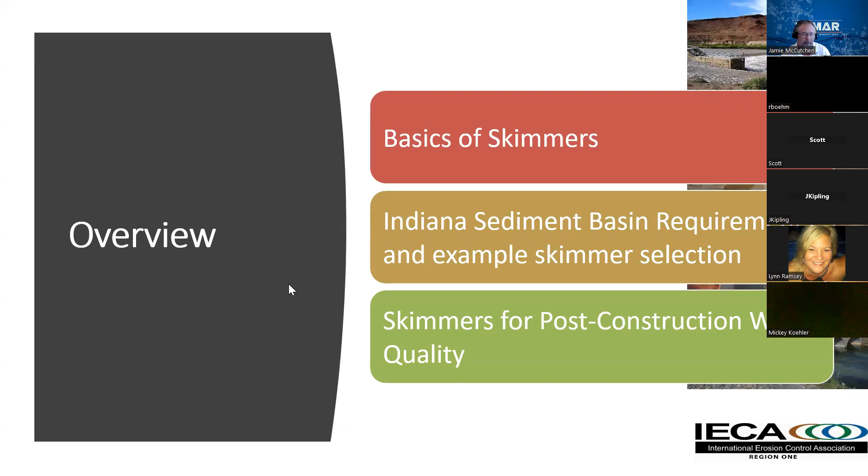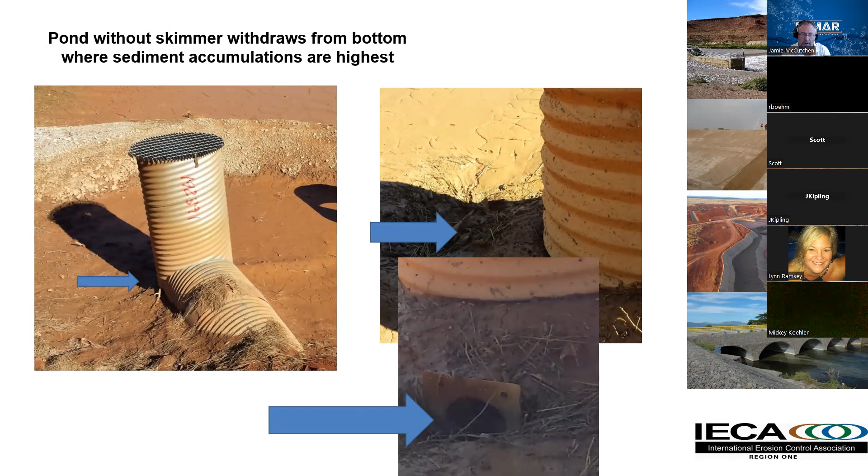Jumping right in, prior to skimmers we used perforated risers, typically designed with an orifice at the bottom, with a stone check dam in front of them. The idea was you would draw water slowly out of the basin, giving time to settle. But you see from these photos, pulling water from the bottom of the basin often results in discharging a lot of sediment, because that's where sediment tends to accumulate.

So skimmers have been around for many years. They've been promoted for use in sediment basins during construction. They meet the requirement for surface withdrawal, or what Indiana is calling floating outlets, which drain the basin from the top down, releasing the cleaner water from near the surface. Skimmers have been shown to greatly increase trapping efficiency - most basins easily obtain 80%, often up to 90% trapping during construction, if they're designed correctly.

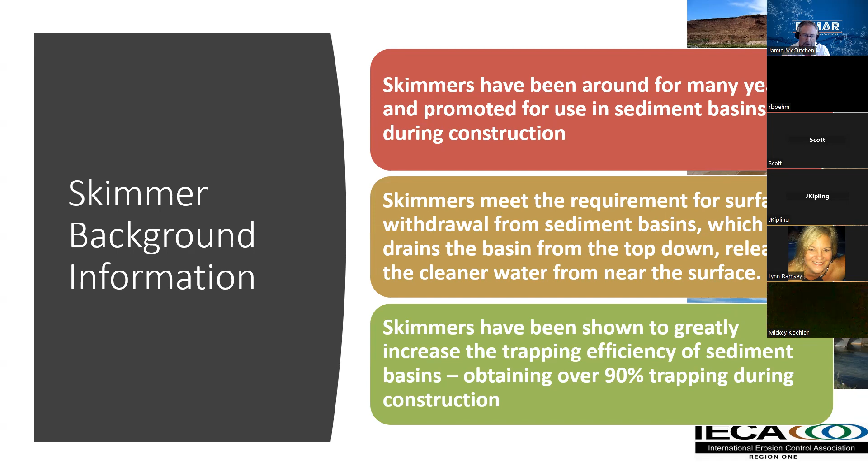So this is just an example of a skimmer. It floats at the surface - this is ours, it's called the Marlee Float. It actually takes water from just below the surface, so it has the ability to stop floating debris from escaping as well. As one of the benefits, it has this debris guard around it.

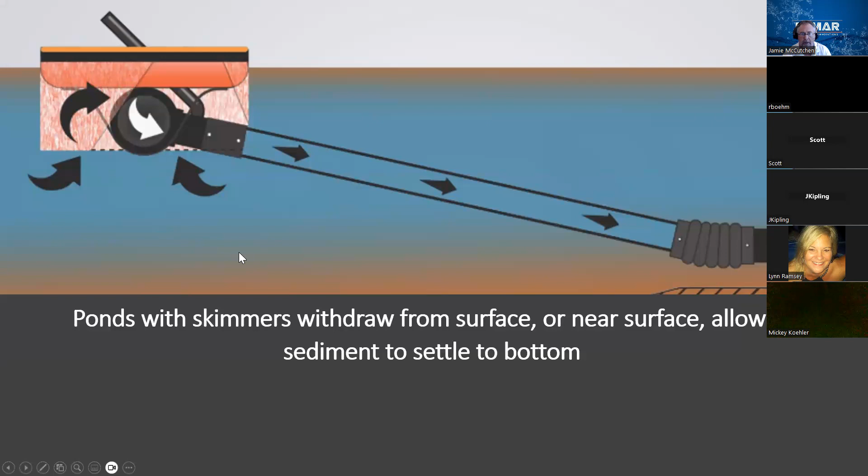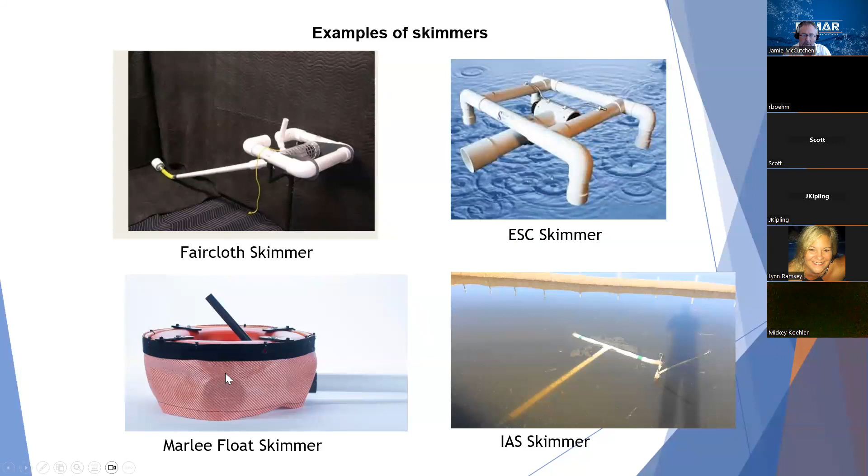There are a variety of skimmers out there. The Faircloth skimmer was the one that kind of started this, so you've probably heard of them. There's also the erosion supply, or ESC skimmer, again the Marlee Float, or the IAS skimmer.

Ohio does include that additional 1,000 cubic feet per acre for disturbed area for sediment storage. So Indiana's standard, at least the draft standard, is a good bit higher than some other states, which is going to make the basins a little bit bigger. I guess something to look at is, are you allowing water out a little too fast, not retaining enough to get the settlement time in there. But anyway, that's the standard as I understand it today.

Surface area - Indiana does not specify one, though other states specify a minimum surface area, so you just want to make sure you meet that. The principal spillway for Indiana is the 10-year, 24-hour storm. That principal spillway would typically be your riser structure and your skimmer, so you're not trying to get the 10-year storm handled by just the skimmer. Then you have an emergency spillway to handle anything above the 10-year storm. Skimmers are required in Indiana for 5+ acres - that does vary, South Carolina is 10 acres.

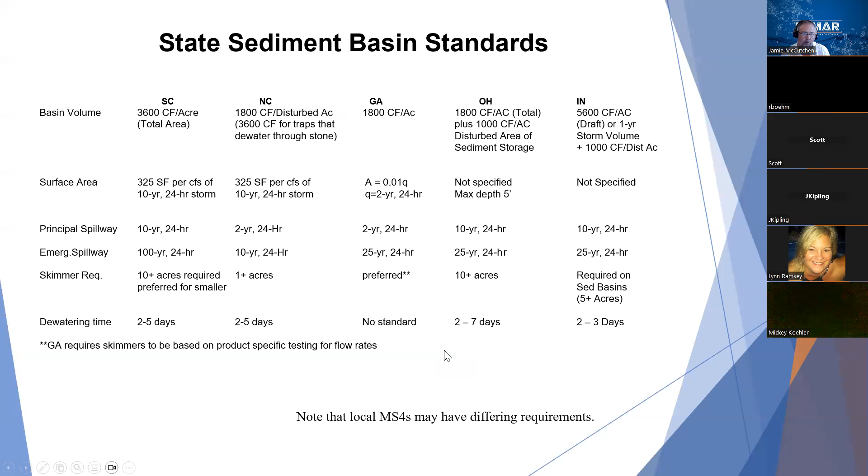Typically these are the state minimum requirements, and then some MS4s may have more stringent requirements if they have waters that they need to protect to a higher standard, or something else like an endangered species or high quality water, trout streams or whatnot. So you may have higher standards in some areas.

Specifically in the 2021 construction general permit, Indiana said sediment basins, where feasible, must withdraw water from the surface of the water column unless equivalent sediment reduction can be achieved by other measures, and it gives some alternative measures.

It also addresses freezing conditions, and that is one thing in the more northern states that has been a question: if you get significant ice in your sediment basin, how does the skimmer function? We recommend, if you're going to have a significant amount of ice anticipated during your construction, that you consider some alternative drain for those times. You may have like just a valve or something you can open to a perforated riser that allows it to drain.

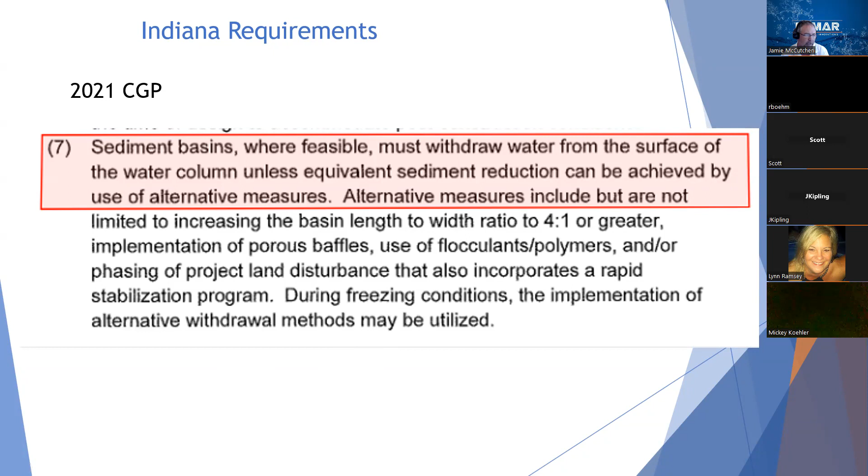The other measures here, again straight from Indiana draft standards, is to retain the stormwater for a period of 48 to 72 hours. Your dewatering zone design is 5,600 cubic feet, or you can calculate your volume for a 1 year, 24-hour storm event. And then again, you have a minimum 1,000 cubic feet per acre of disturbed area. This volume should not be included in your dewatering storage volume. That's additional storage volume for sediment storage that you will probably want to put in below the invert of your skimmer.

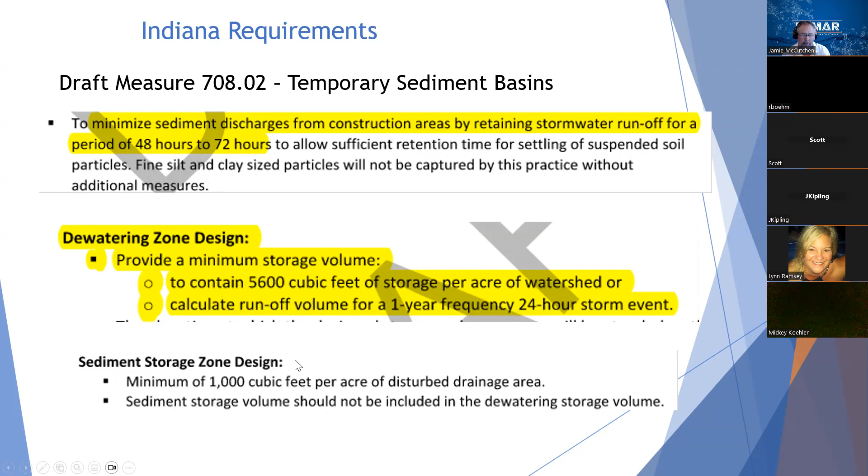So let's just go through the fundamentals. The fundamentals of skimmer basins, number one is, what is your dewatering volume? Again, 5,600 cubic feet per acre. So if we run that, say an example, 10-acre site, got 56,000 cubic feet.

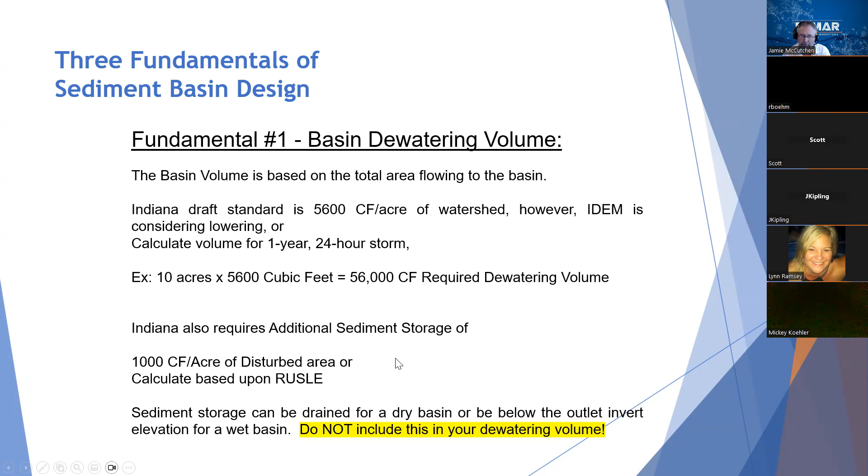And again, you got the additional 1,000 cubic feet of disturbed area, or you can calculate that based on the RUSLE equation. We do emphasize, do not include that in your dewatering volume, or you're just going to make your skimmer bigger and drain that other volume too fast. So dewatering time is your fundamental number two. Again, Indiana is 48 to 72 hours.

And then based on those two factors, you're going to determine your flow rate for your skimmer. So using our 10-acre, 56,000 cubic foot volume, a 2 to 3 day range, you're going to want to pick a skimmer between 28,000 cubic feet and 18,700 cubic feet per day for that flow rate. If you do that, you will meet your 2 to 3 day drain time for that required volume.

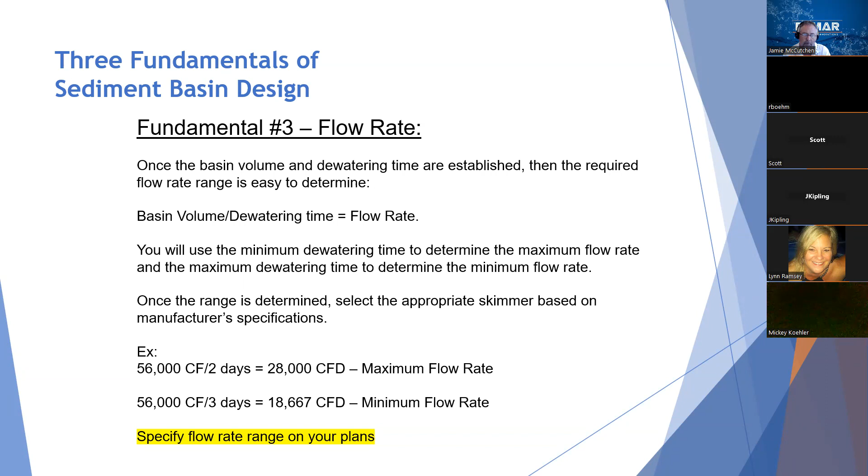One thing to point out, especially if you're just learning about skimmers, is skimmers are not all equal. Georgia commissioned TRI Environmental to do a study on skimmers when they were updating their manual. They tested 3 different types of skimmers, and I use this as a good example. This is 3 different 3-inch skimmers. Their test tank is 4 feet deep, so flows go from 1 foot to 4 feet.

2 of the skimmers are pretty consistent, around 37 GPM, while the third one is almost double at 70 GPM. The other thing you'll notice is that all 3 skimmers had an increase in flow from 1 foot to 4 feet of about 25% of their flow rate. So these two were still fairly consistent, around 50 GPM, one just under, one just over, but the other one, again, is nearly double at 90 GPM.

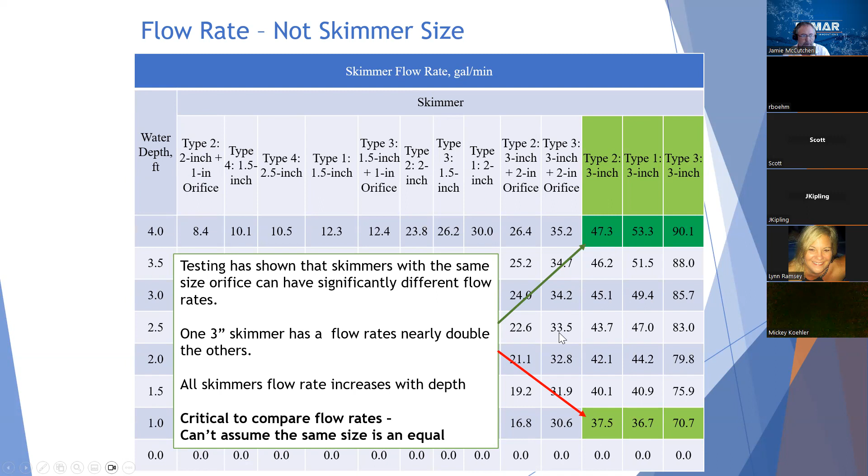So the point is, if you just simply say a 3-inch skimmer and don't say the brand or anything else on your plans, you may not get the skimmer you're wanting. You may, if you intended to have one of these skimmers do it, drain the volume too fast. If you intended to have the other skimmer, you drain it too slow. So it's important to focus on flow rate, not just skimmer size. And so we have a really simple design tool on our website.

For Indiana, we'd recommend using the one with a permanent pool. And we worked closely with Ohio in developing this tool because they were seeing some common issues with engineers when they were going through this.

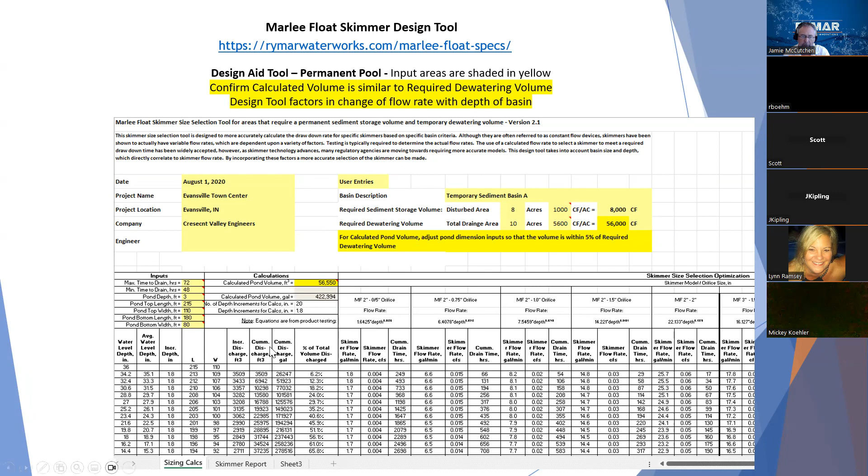And then you click on the skimmer report page here at the bottom, and that'll take you to a nice, neat 8.5 by 11 sheet that will give you the information that you have. So at the top, you're going to have this check to confirm your required dewatering volume and your calculated dewatering volume are close. So for the reviewers that are here today, that's a quick check to make sure that the skimmer sized correctly based on what's required.

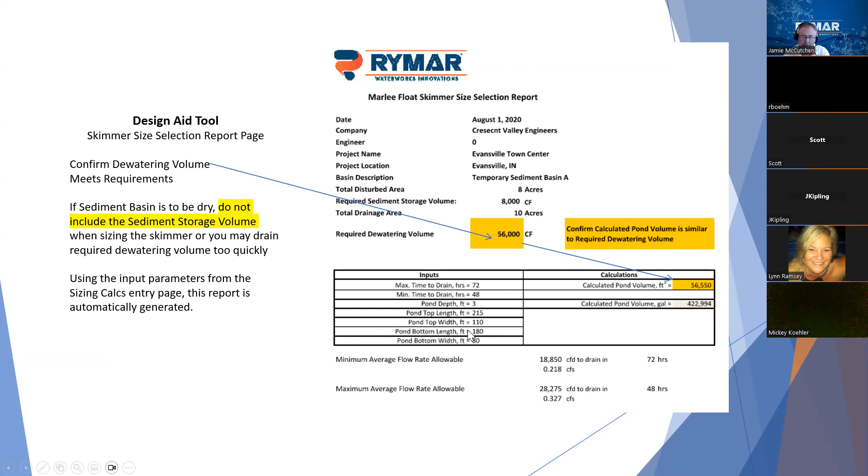You're going to have your minimum and maximum flow rates here, and all the information you put in to determine this, readily available. And because it's our tool, we're going to give you which skimmers meet your required time. So in this case, we had 2 different options: our 6-inch with a 3.5-inch orifice, or a 6-inch with a 4-inch orifice, range of 52 hours to 68 hours. So the engineer can pick either one, whether they want to drain a little slower or a little faster. But really, it's a simple Excel tool available on our website.

There's no sign up or login or anything to download that. And we intended this to be a simple page you can print out, include in your SWPPP, or we often see engineers include it in their plans to give that information.

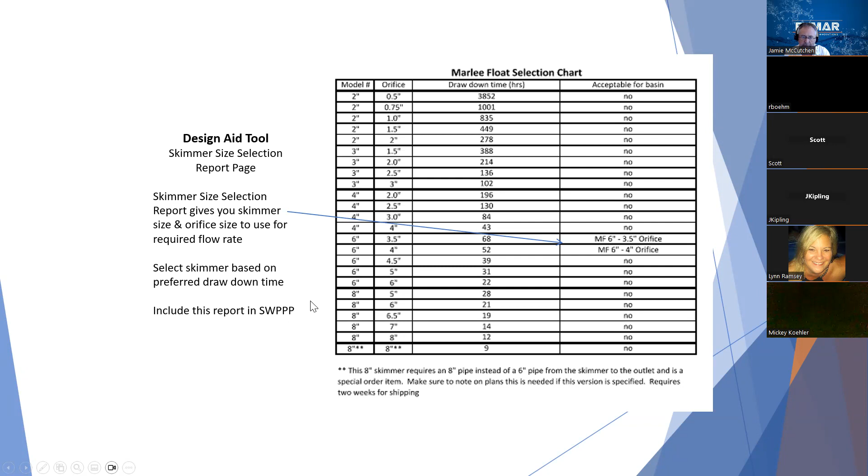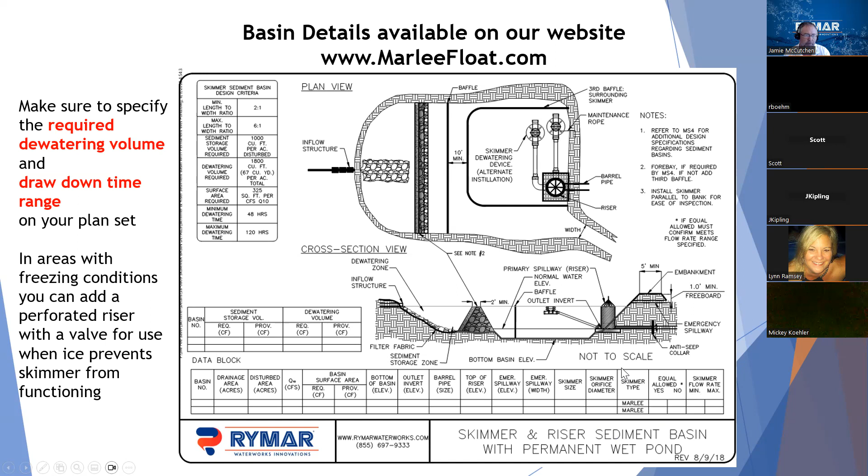And then what's your skimmer flow rate. Go ahead and set your minimum and maximum. And that way, if the contractor does want to use a different skimmer, as long as it falls within that range of flow rates, it should be approved without having to go through a whole lot of review time to confirm that.

Real quick, we'll go through some skimmer installation photos, just some things to look for. Again, understand that in Indiana they're not quite as common. So one of the things we want to look for here is this pad. Most places specify some sort of a stone pad for the skimmer to rest on. The detail that we have specifies a depression, because what you're going to notice here is that pond was graded.

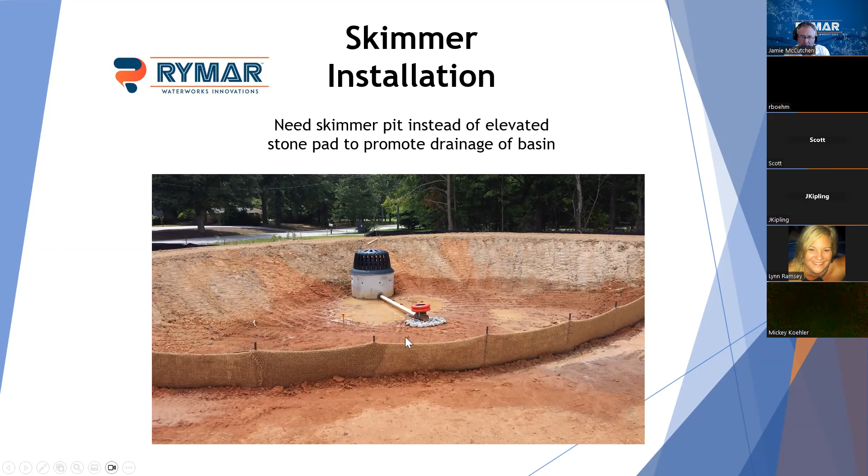It looks good - they tracked in the sides, they got their baffles, everything's looking pretty good to start with, except that then they put the stone in, and that means you're going to have, if this was intended to be a dry basin, water ponding in there. Now in Indiana, with your sediment storage volume, you're going to end up being a wet pond. So this should always be sitting below, and you're probably always going to have a little bit of water ponding in there. We've seen some really bad installs.

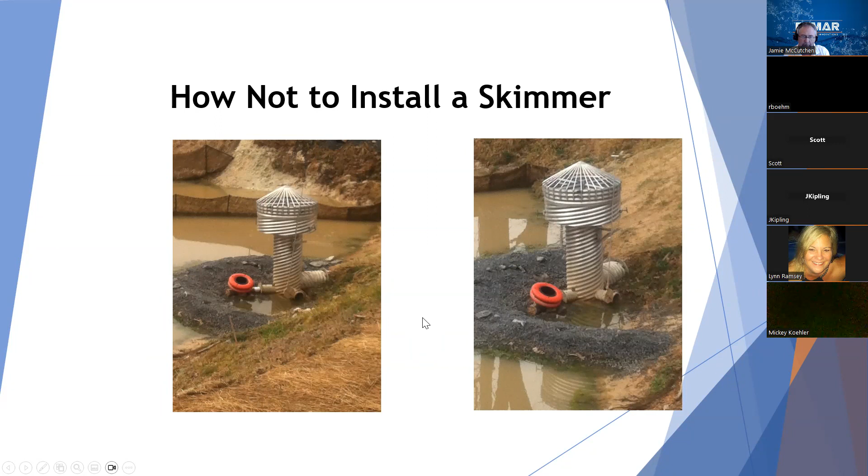This came from an inspector, I think in Ohio, but the contractor just did about everything possible wrong in this picture. And then sometimes they even put them in upside down - so they put it upside down. They didn't put in near enough room here for the skimmer to float up. Again, a lot of things wrong by the contractor.

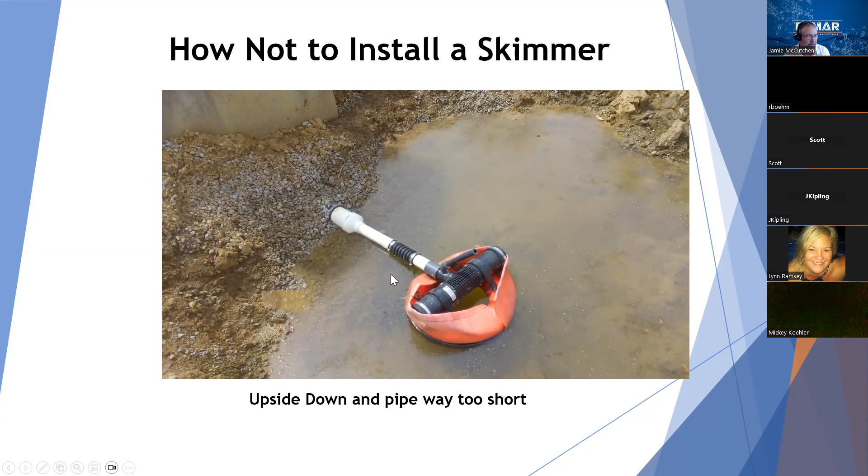We do have reps that cover our states, and we also work with our distributors. We typically sell through Core & Main, Ferguson, and other local waterworks suppliers, and we try to train them so they can tell the contractors. But if you ever see a bad install, please reach out to us and tell us - we'd be glad to reach out to the contractor and help them do it right.

Last picture here is a maintenance item. So if you ever see vegetation growing out of the skimmer, it probably needs some maintenance. This one had a big root ball growing in it. So they're not maintenance-free items - they do require maintenance occasionally.

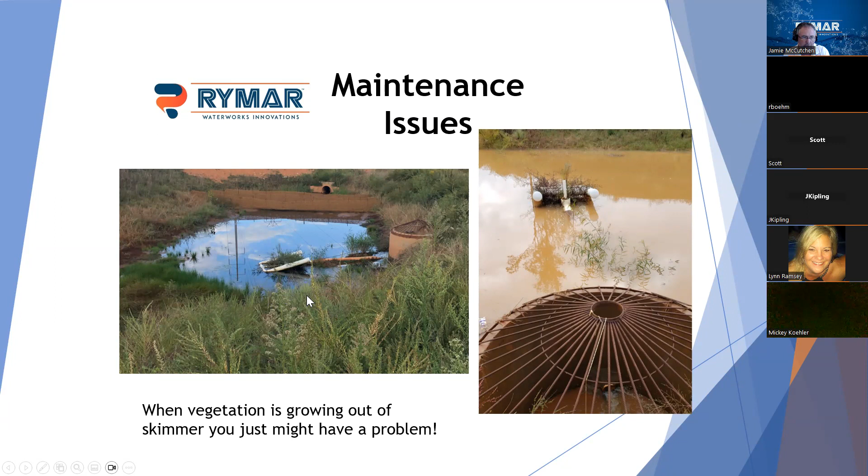So that kind of covers the very basics of skimmers. The other thing we want to focus on today is permanent use of skimmers. I was told by someone - and haven't found this in the regs yet - that Indiana was looking at incorporating some sort of floating outlets for permanent use as well, and we'd really encourage that. We know we still have to address the freezing issues, but skimmers can be really good for maintenance.

So you'd want to consider them for permanent use, because number one, basins are designed to capture pollutants by allowing time for settlement. That's been the standard for water quality - you hold that first flush volume and allow things to settle. And so if you're going to do surface withdrawal from a permanent retention basin, it's going to release the cleaner water from near the surface and get more time for pollutants to settle.

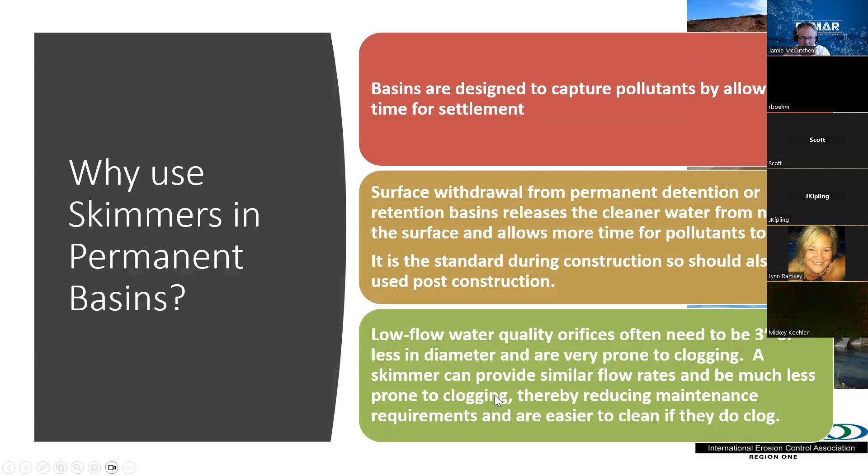It's become a fairly standard practice during construction, so it doesn't make a lot of sense to do that during construction and then post-construction take out the skimmer and pull the water off the bottom again. And then the other thing is low flow water quality orifices often need to be 3 inches or less in diameter, and they're very prone to clogging. So a skimmer can provide a similar flow rate - it can have a larger orifice because it's got less head, and it's going to be much easier to reduce clogging.

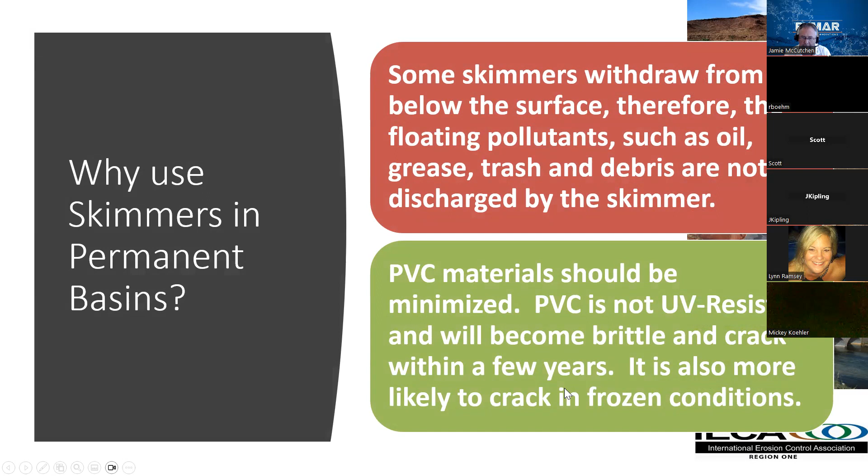So the other thing is some skimmers, like ours, withdraw from just below the surface. Therefore, floating pollutants such as oil, grease, trash, and debris are not discharged by the skimmer. Also, PVC material should be minimized. PVC is not UV resistant and will become brittle and crack within a few years. It is also more likely to crack in frozen conditions when freezing is a concern.

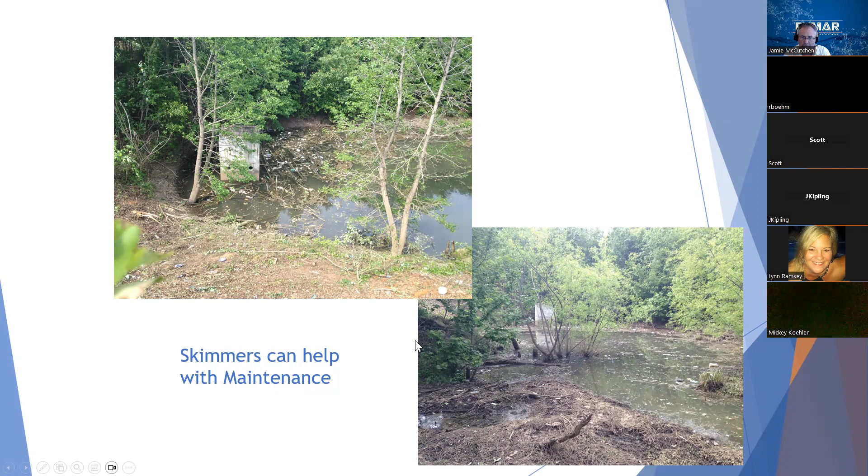So this is a quick example of how skimmers can help with maintenance. This is a site we did in Simpsonville, South Carolina. It was a really overgrown site - the pond was in bad shape. Turned out that there was a 2-inch orifice about 6 feet below all this muck. So we redesigned the pond to use a skimmer instead of that 2-inch orifice.

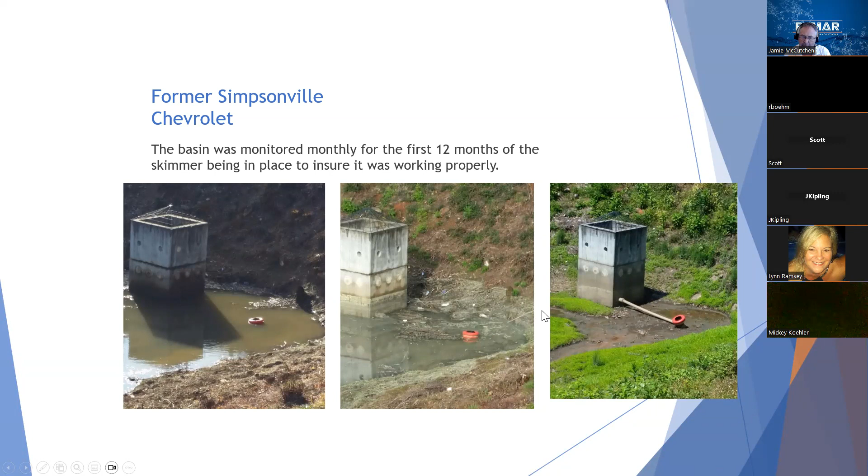This was a pilot project in South Carolina, so we were required to monitor it every month for the first year and then quarterly for the 2 years after that. About a year after we put this in, they were maintaining the pond, but they did not get all the debris out. It had about a 5-inch rain in just a few hours, and you can see all the debris that came down here, got to the pond, to the basin, and to the outlet. And the skimmer was still able to drain the pond down without getting clogged.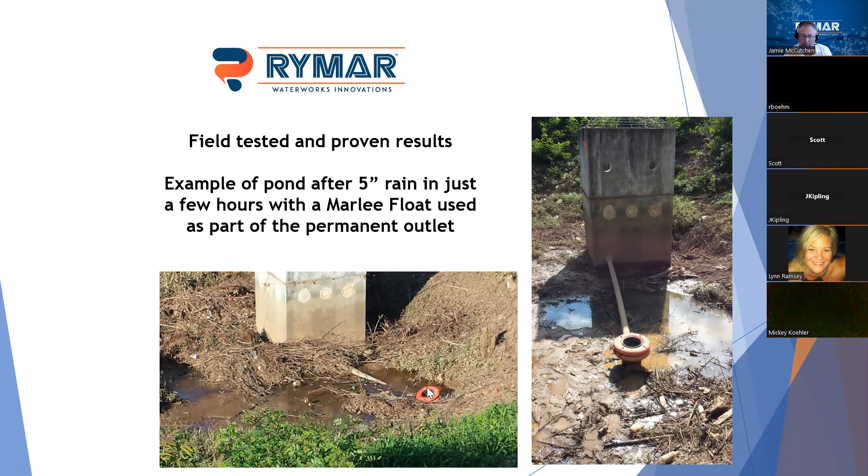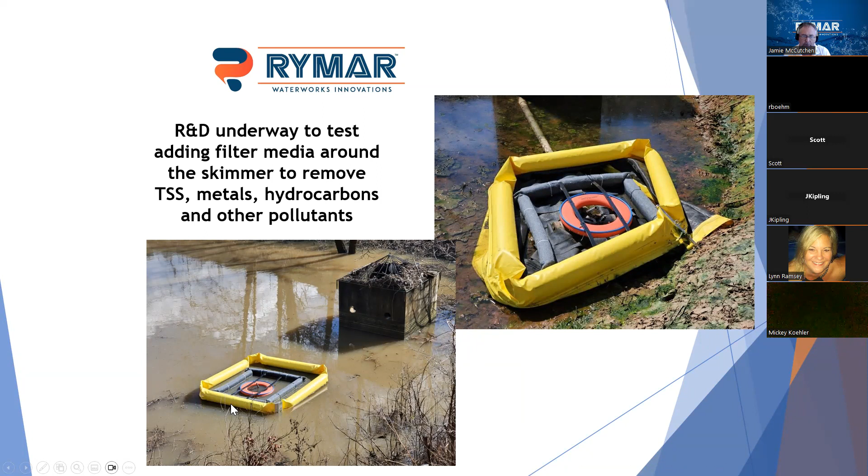Last thing about this, we've used this pond as kind of a guinea pig. We're doing R&D to test a filter to go around the skimmer to be used for post-construction.

Some of the benefits to using skimmers with filtration versus using the settling process: the skimmer can be sized to control the peak rate for the lower storm events. It also increases filter efficiency by withdrawing from near the surface where the water is cleaner, and it's easy to access for maintenance and changing the filters.

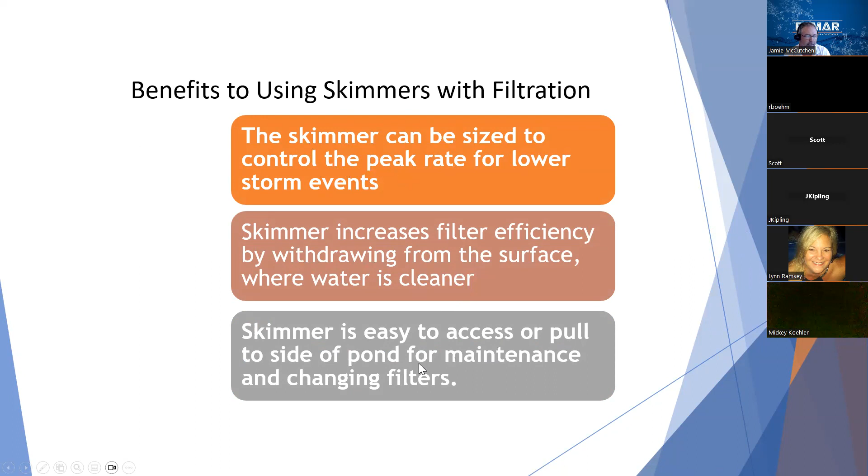However, there are some problems or challenges with using filtration. The filters are prone to clog over time, which will require maintenance and periodic cleaning or changing. As we said, your skimmer's got to be durable. It's got to last more than a few years to be suitable for permanent use.

And the biggest one, for all the folks here that are with MS4s with the state, there are no established standards for basis of design and permitting based upon a combination of pond and filtration. So what we typically see is the first flush water quality volume being held for a certain amount of time. But if you try to treat that with a filter instead, how do you do that?

I'm not sure if we have anybody from Indianapolis with us. I understand Indianapolis does have a list of approved devices, and to be on that list, the first criteria is you be tested by or certified by NJCAT. We have not had our filter certified by NJCAT yet, but it is tested to an ASTM standard. So Indianapolis has said they may have to change that and allow the ASTM standard before they can allow our skimmer there. But most other MS4s in the state have said this concept would be acceptable, at least to be considered on a site-by-site basis.

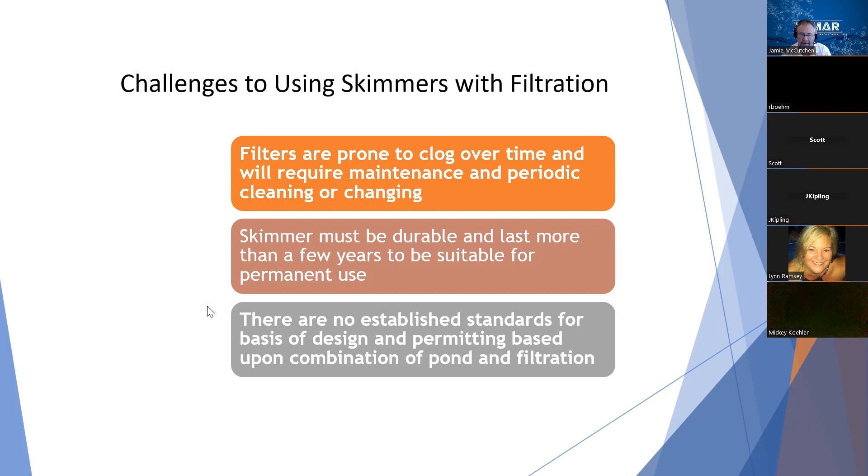So again, this goes back to our kind of guinea pig site. We've now tested this—we actually did the testing in a lab. It was tested by TRI Environmental, to a relatively new standard by ASTM. And it confirmed that we got over 90% TSS removal with our combination skimmer-filter setup.

Our filter is a two-stage filter. The outer stage is a polypropylene woven mesh—basically just a big screen. The inner filter is a non-woven material called Adsorbate. It's great with TSS, it also helps with hydrocarbons, has some benefit for metals, and we're hoping it may have some benefit for phosphorus and nitrogen as well, but we have not tested any of those. We've only really tested it for TSS with the skimmer so far.

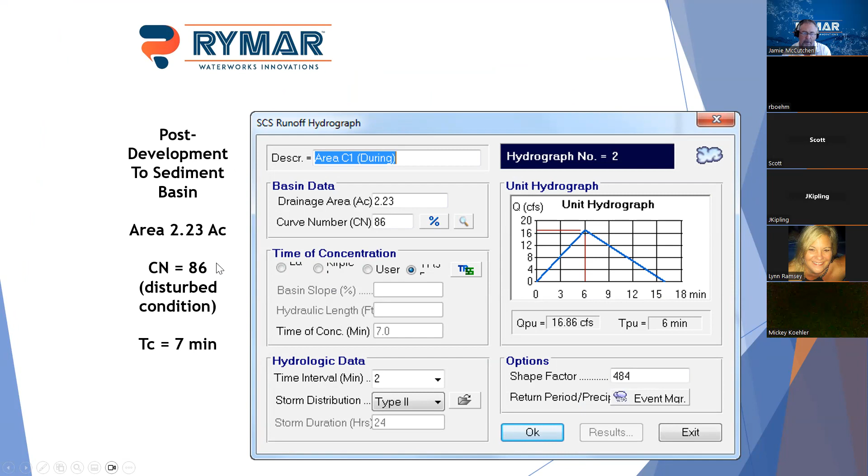So go through quickly the modeling for Hydraflow. Hydraflow has kind of become the standard for hydrology modeling. The main thing there is a kind of example site: we have a site with 2¼ acres being developed, curve number of 86.

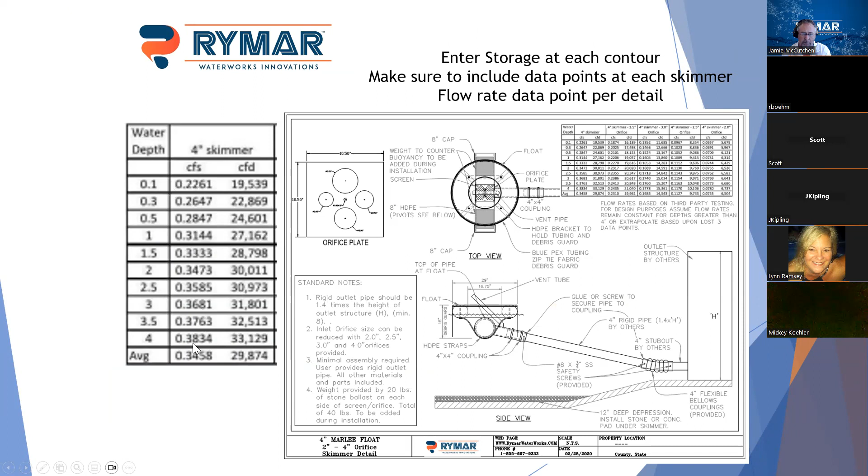When you're developing your pond stage storage table, what you want to do is put in a stage so that you can put in a flow rate. In this case, we did 0, 0.1, 0.3, and then a half foot up to 4 feet. Then you just take the flow rate from our details—our skimmer details provide the flow rate at those intervals—and use the user-defined column to enter that information.

So you'd put your standard barrel in, your culvert A. In this case, we had a 6-inch orifice about 1.75 feet above the bottom, the top of the riser, and the riser had a rectangular weir in the top. But to put in the skimmer flow, we use this user-defined column.

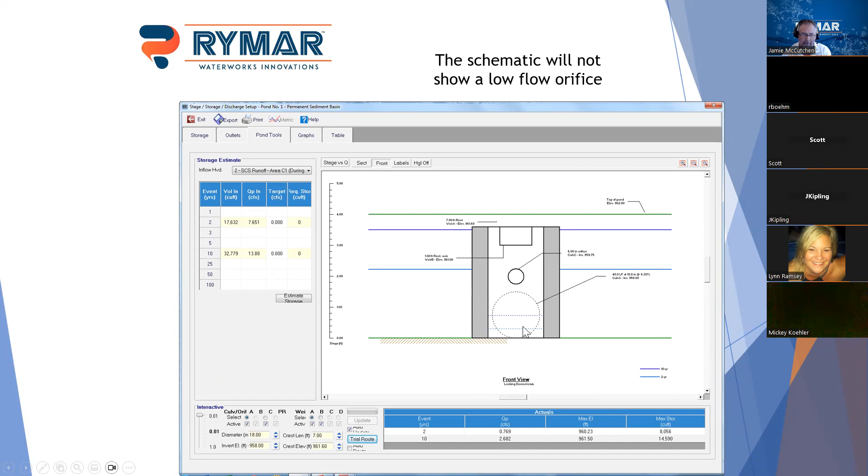And so when you look at your schematic of Hydraflow, it's going to look something like this, where you normally would have a low flow orifice here—you don't have that. You've got your other orifices configured in there, but you can see your skimmer flow here. That's the flow rate for your skimmer.

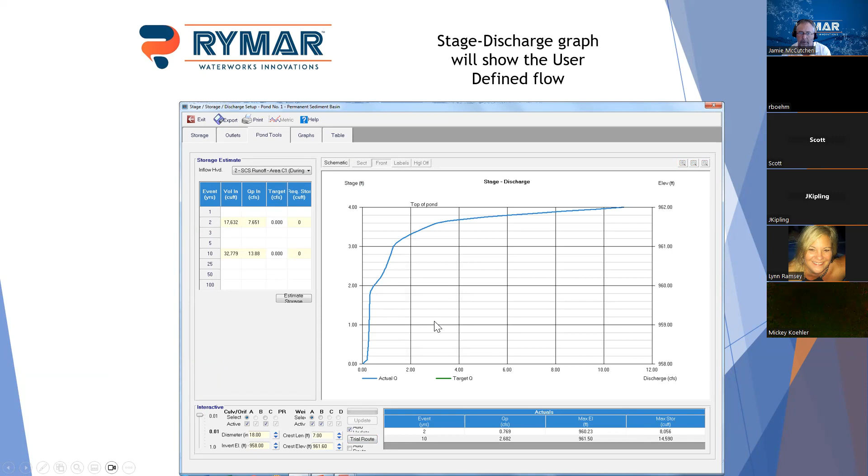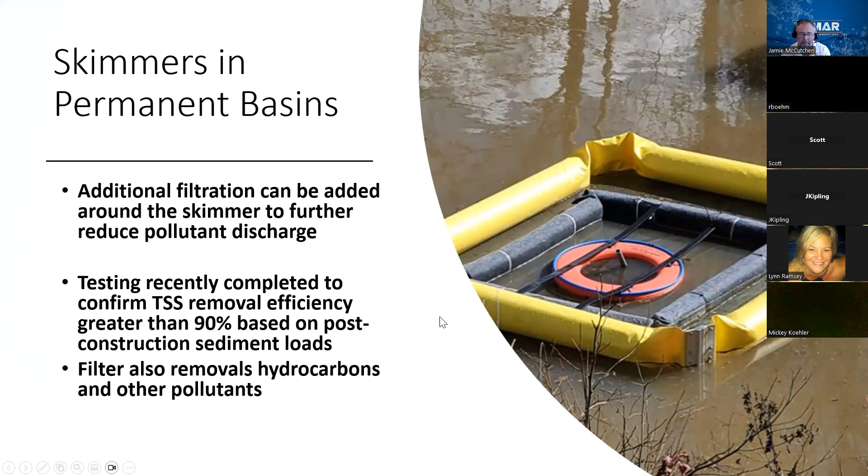So that's just a basic example, not intended to be an intense training course, of how to model the flow with a skimmer. The last thing we want to touch on is the filtration-based water quality. We've done our testing, met 90%, but now if you're going to do that, how do you incorporate that into your plans?

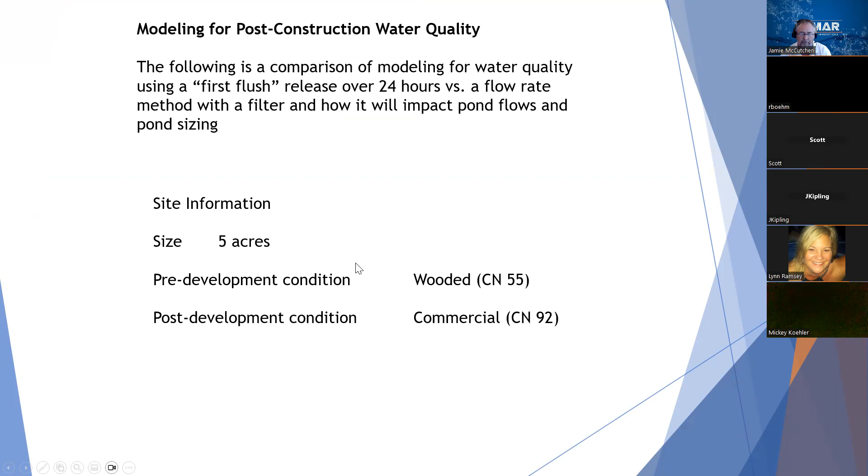So we'll take an example 5-acre site. Let's say we're going from a wooded condition to a commercial condition, and compare how a traditional water quality first flush model compares to a filtration model.

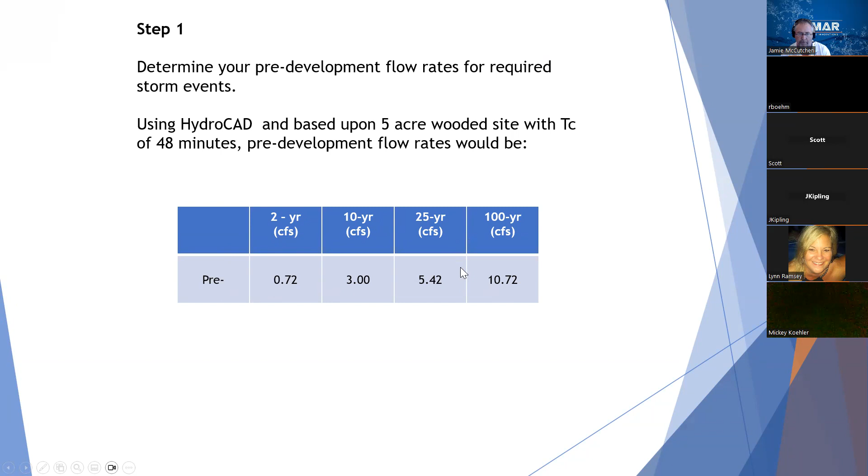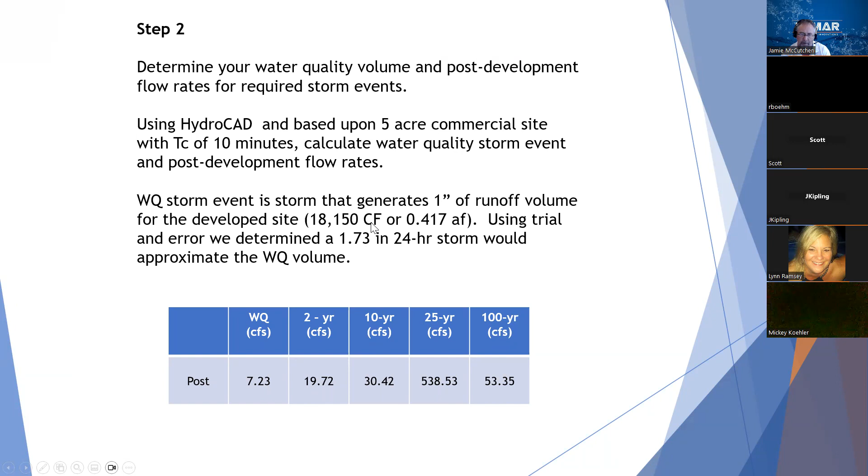First thing you're going to do is get your flow for your pre-events. Most areas it's a 2, 10, 25, and 100-year storm. Some areas may require a 1-year, 5-year, or 50-year storm, but whatever it is for your local area. Then you determine your post flow prior to detention. In this case, we also ran an event for a 1-inch runoff volume, which is typical in South Carolina for first flush. Some states require 1.2 inches, some have other volumes, but it equated to an 18,000 cubic foot volume for this pond, and that was our post-development flows.

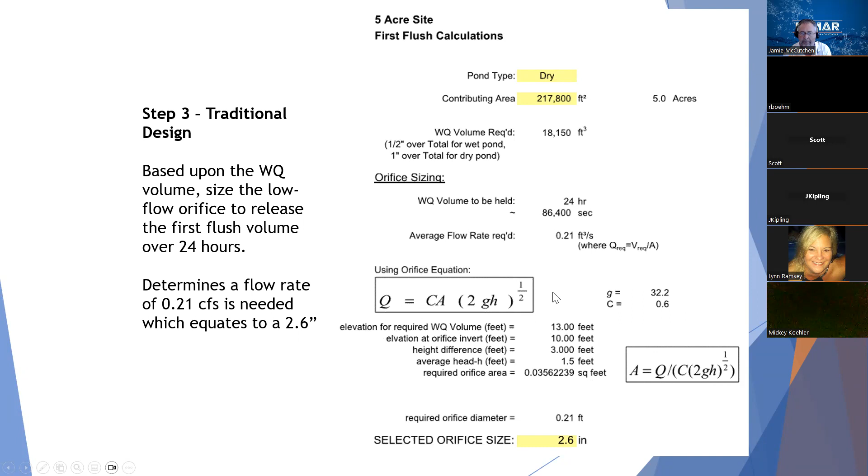Most engineers use some sort of spreadsheet and calculate that low flow orifice. They assume that entire first flush volume magically appears in the pond instantaneously, and then size the volume to drain that down over 24 hours or so. Doing that, we plug this stuff back into Hydraflow and ran the model.

What's really interesting here is we have a water quality volume of 18,000 cubic feet, but our water quality storm is only using 10,000 cubic feet of that volume. Typically you can't put a second orifice below that water quality volume, so you've got some volume in that pond that's not really being fully utilized.

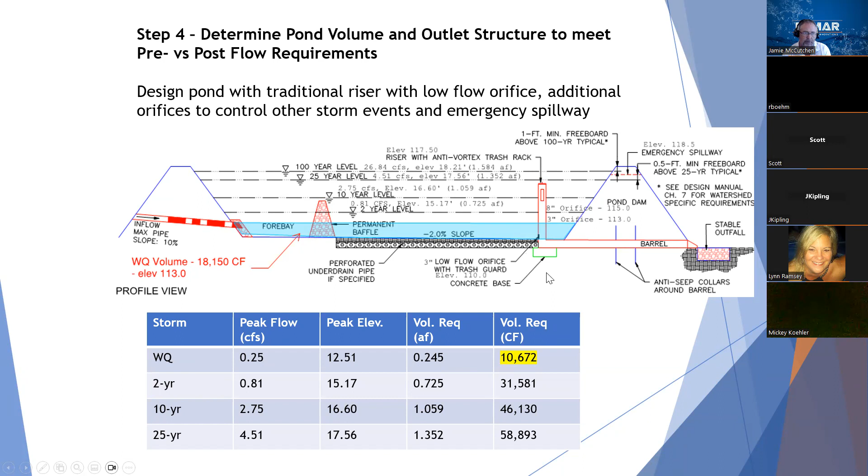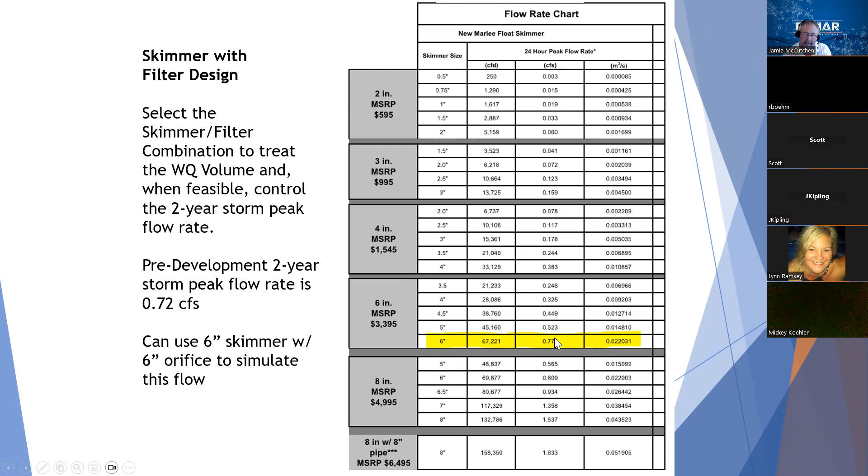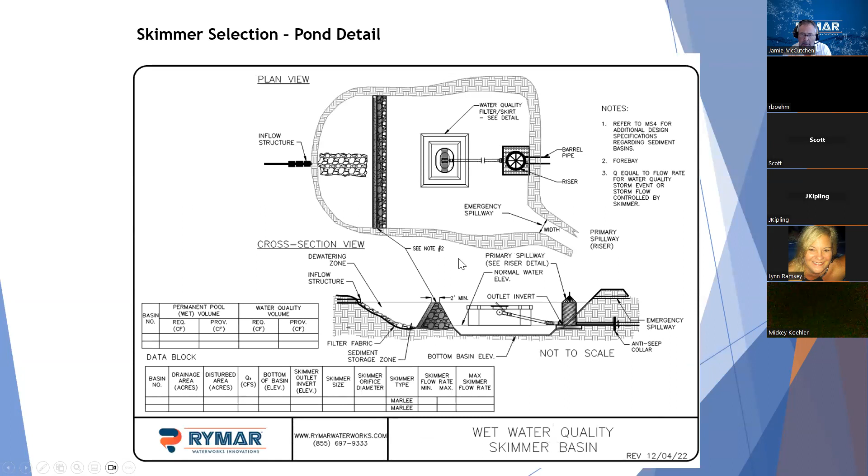Let's move fast through that. We want to compare that to using a skimmer. Again, we had a 0.72 flow rate for our 2-year storm event, so we picked our 6-inch skimmer with a 6-inch orifice, which has a 0.78 CFS flow rate at 4 feet. This was the detail for the skirt, how it would go around the skimmer to provide the filtration, and this detail for the pond showing what it would look like with the filter and skirt in place. But we ran the same volume here.

Instead of worrying about retaining that first flush, we just said, let's try to control the 2-year storm with our filter skimmer. The advantage here is now we're treating all the flow, not just the water quality storm, but all the flow from the 2-year storm and below is going through our filter. So we're now treating a larger amount of annual rainfall. The water quality event only needs 7,500 cubic feet of volume, but we're still detaining all the other storms as required.

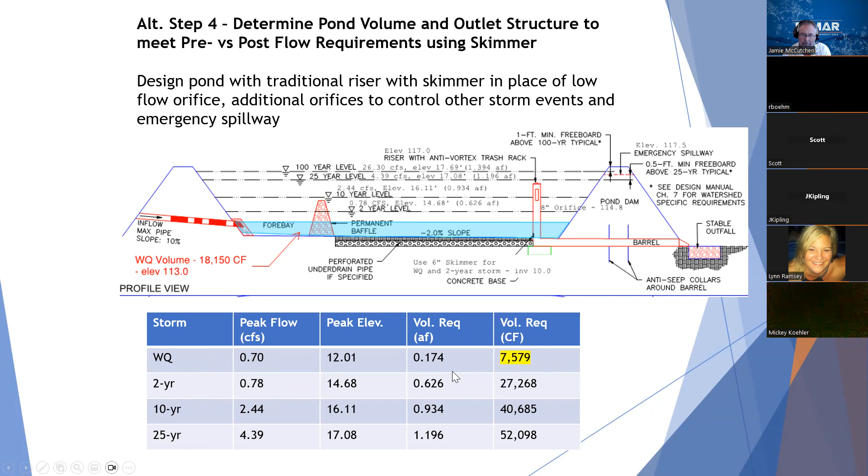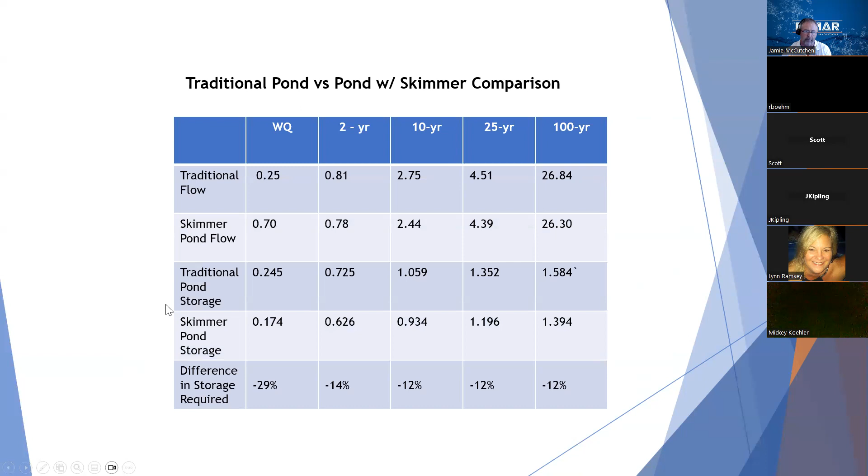If we compare that, the difference in storage required for the water quality event is almost 30%, and on the other storm events it's somewhere in the 12 to 15% range. So in effect, you are making your pond smaller, but treating more of the annual rainfall, and actually treating it fully to a 90% TSS removal rate. In our opinion, this is a win for the developer—they're retaining more land. It's a win for the regulatory community and for our environment because we're treating more of the rainfall. And hopefully it's a win for engineers because we've now got a product that's easily shown to meet those requirements.

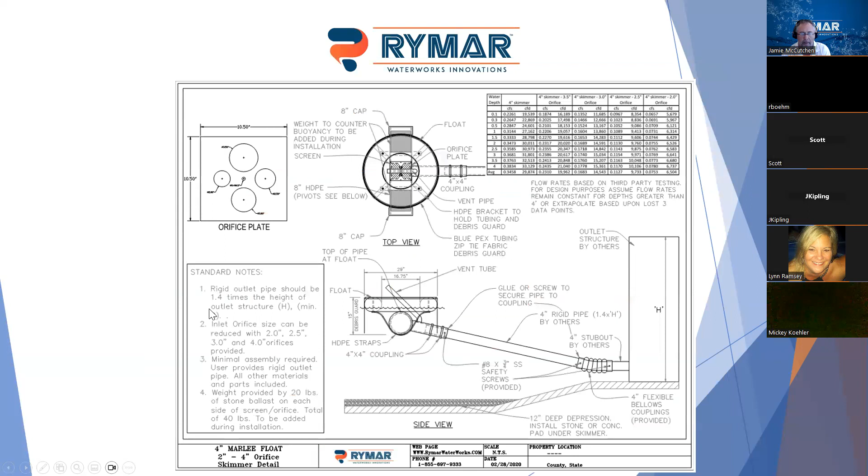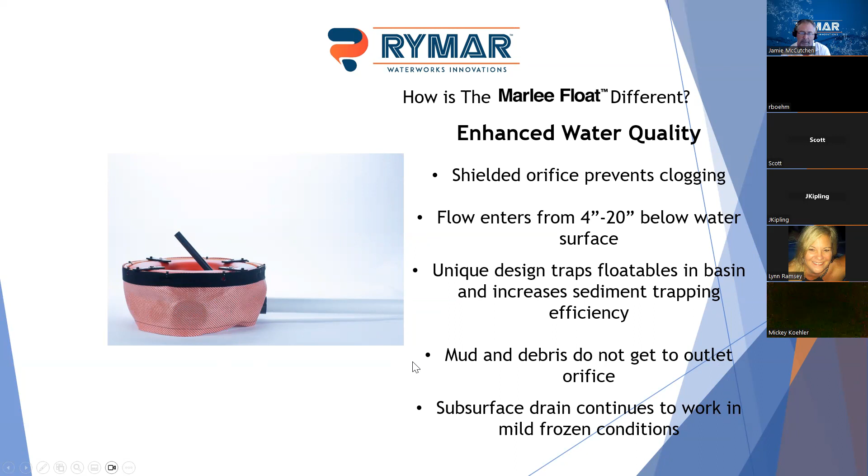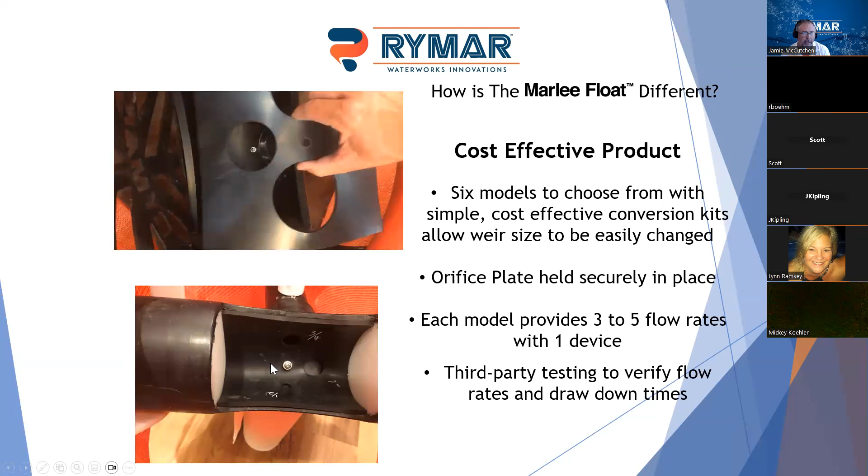We have our standard details, and then some information about our skimmer. Again, it's an HDPE product, it has the debris guard to keep out any floating debris, and it will work in mild frozen conditions as we take water from below surface about 4 to 20 inches. But if you're going to get a foot of ice, it's going to freeze and get stuck, and it's just going to sit there until it melts. We have a unique orifice configuration where we have this orifice plate, so you just rotate it, and it allows you to change your orifice size very easily.

And then this is our models—we have 6 different models, ranging from our 2-inch...